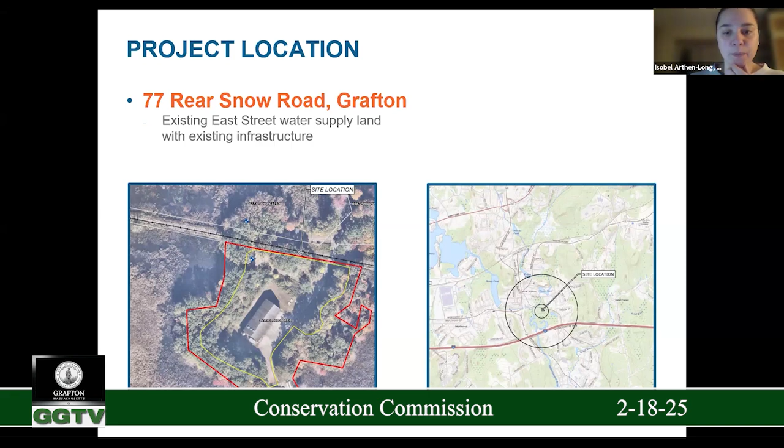Can move to the next. A little bit of project background. The Grafton Water District is supplied by 5 groundwater supply wells, 2 of which are located at East Street. PFAS concentrations measured in these 2 wells have been between 10 and 20 parts per trillion. Until 2024, these concentrations were below the maximum contaminant limits for PFAS.

But last year, the EPA lowered these limits to 4 parts per trillion. So in order to remain in compliance with drinking water quality standards, the district either needs to treat for PFAS to lower those concentrations, or would be forced to take those wells exceeding 4 parts per trillion offline, which would then impact their ability to provide sufficient water to meet their water supply demand.

Could you give a brief description of what PFAS is and why it's important that it's being removed? Sure. These are persistent chemicals that have become very widespread in our environment and particularly in water. Certainly not an expert, but they're chemicals found in many different products that we use. They're found in the linings of freezer boxes and takeout containers, found in detergents, found in all sorts of materials, and they've accumulated within our water supplies. There's a lot of research going on now into the long-term effects of exposure to these compounds.

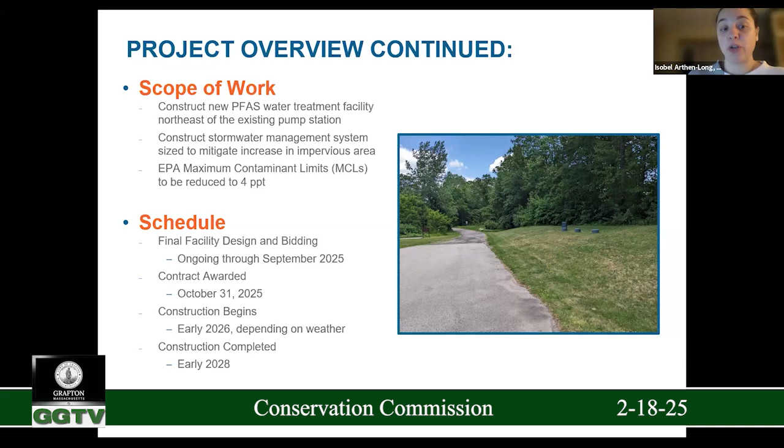So let's move on to the plans here. We supplied plans to you all. I hope that you've been able to review them.

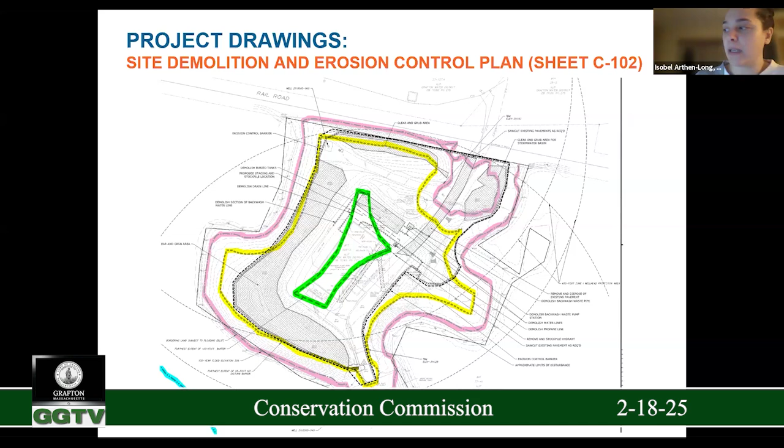Things to draw your attention to here, you can see around the limit of work is going to be our proposed new tree line. And along that limit of work, you can also see the placed erosion controls.

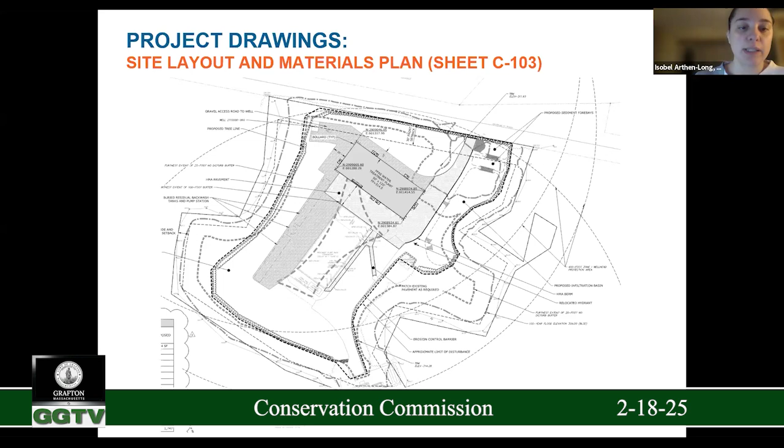That will also reestablish a gravel access route to one of the existing wells.

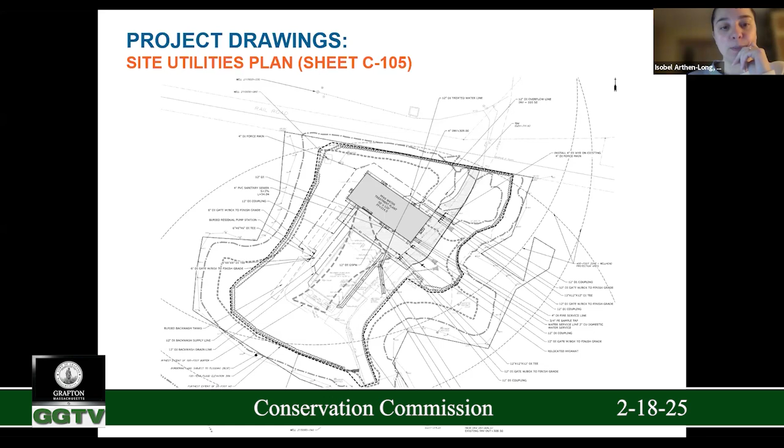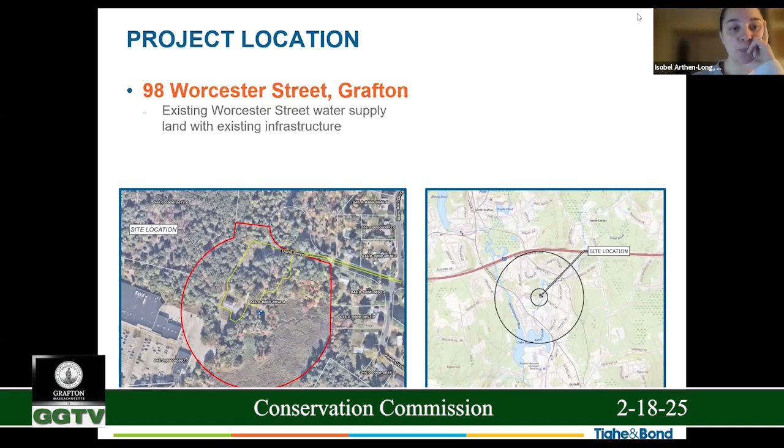So it's the same story at Worcester Street as it is at East Street. The PFAS concentrations at Worcester Street have measured in that same range, between 10 and 20 parts per trillion, which until last year have been in compliance with maximum contaminant limits. The intention of the project is the same: to treat these PFAS levels to bring them below the new 4 parts per trillion maximum contaminant limit. This treatment plant will also have manganese and iron treatment to keep below those thresholds. So in addition to PFAS, it'll be treating for those metals.

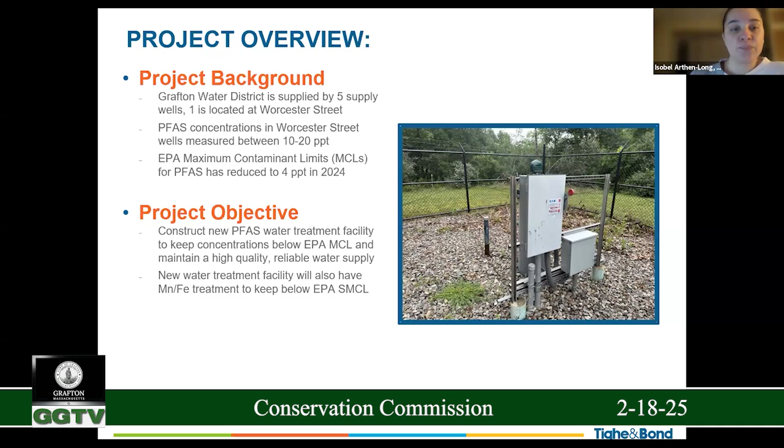So the scope of work is very similar here. We'll be constructing one new water treatment facility to treat for manganese, iron, and PFAS. It'll be just northeast of the existing treatment facility. Likewise, we'll be constructing a stormwater management system to mitigate the increase in impervious area.

The schedule is the same. These are being treated as a single project for all other purposes, so they'll be on the same timeline.

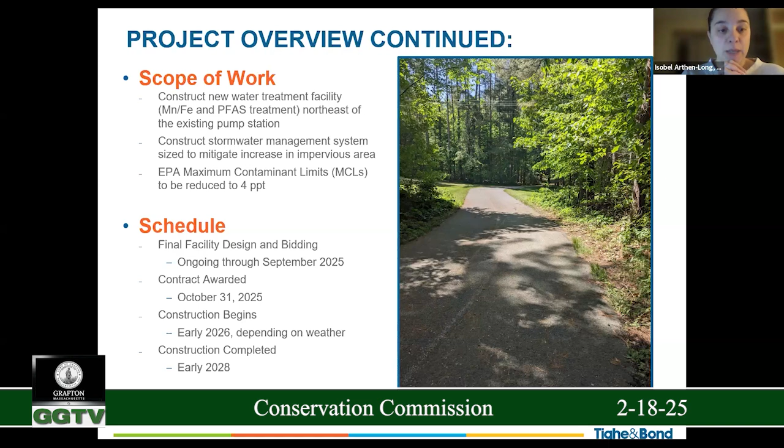I'll also mention that the entire limit of disturbance at this site is located within mapped wood turtle habitat, which is listed as a species of special concern in Massachusetts.

So again, on this sheet - if you just go back one, thank you - the hatched areas show the limit of clearing and grubbing, as well as the saw cutting of this existing access road that will be repaved running through the center of the site.

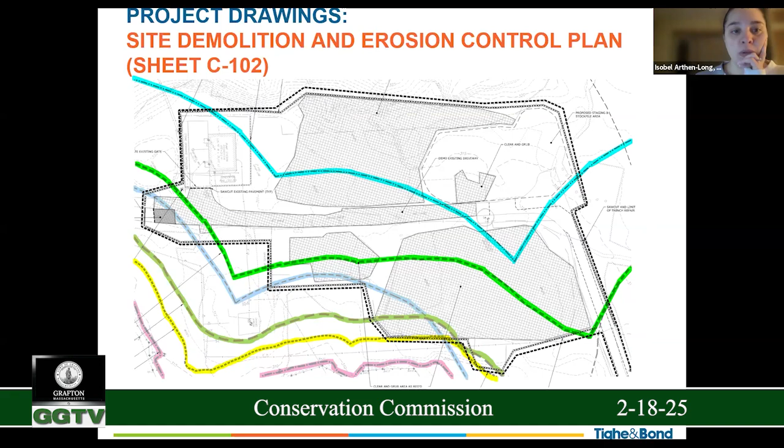Okay, we can skip now. We do have a north arrow shown on this one, so it's pointing towards the top right corner of the screen.

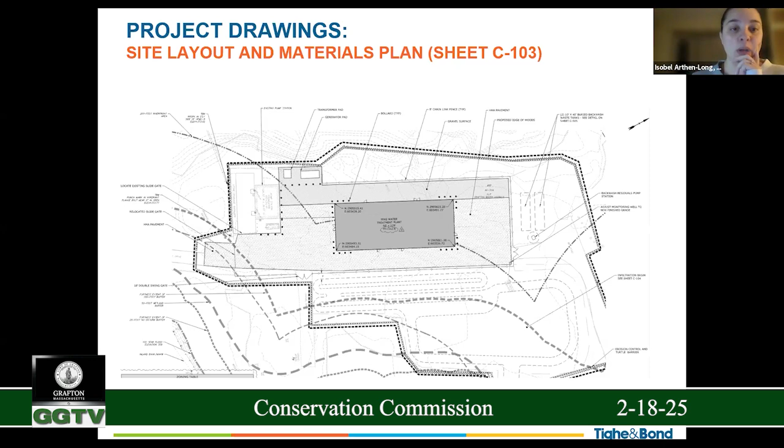Again, you can see here the proposed new tree line just around the limit of disturbance, where there are also proposed erosion controls in place. The footprint of the new water treatment plant is located approximately 60 feet from the existing facility. And we have paved access areas around 3 sides of this building, and then a gravel area up above it in this location in the rear of the building.

Go on to the next, showing site grading at the site. Again, it's proposed primarily to manage stormwater at the site. And this stormwater system has been designed to fully mitigate the increased impervious area and comply with Massachusetts stormwater standards and local bylaw.

Okay, look at site utilities here. This sheet shows new and replacement site utilities. Some of these utility installations will be taking place within existing paved areas and qualify as exempt under the Wetlands Protection Act.

If you go down to the next one, the site utilities at this site extend down Doris Drive. And since this is a new area, I have our resource areas delineated here again, or highlighted. All of these utility installations will be within the paved roadway right-of-way. There are some areas that are within buffer zone and riverfront area that, again, meet that exemption.

There are a couple of areas where the 25-foot buffer zone to wetlands and bank slightly overlaps with the limit of disturbance that's shown. We're showing the limit of disturbance here as the full width of the road, but these trenches will probably be about 5 feet wide a piece. So they may or may not actually overlap with the work that is being done, but we did report impacts associated with underground utility installation within that 25-foot buffer zone. It just may or may not overlap, and we are requesting a waiver in the event that that work does occur within those areas.

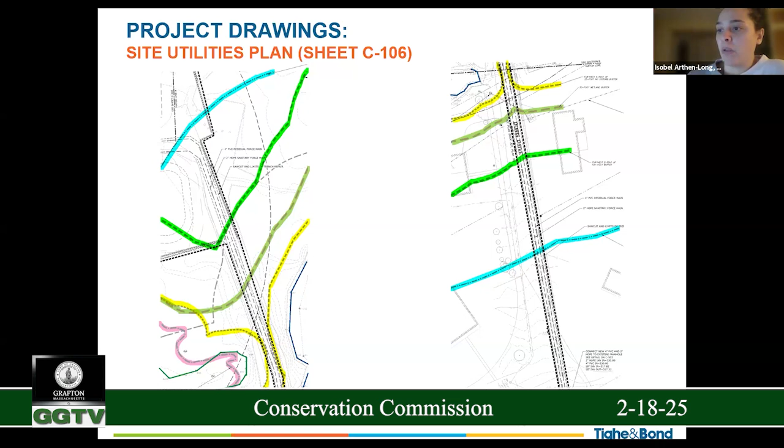So if you go down to the impact table for this site, we have no impacts to BLSF as we did in the other site. This time we're working with riverfront area as the direct impacts to resource areas. Other than that, it's again fully buffer zone and setback impacts, as well as rare species habitat.

I'll mention that this project is being reviewed concurrently under the Massachusetts Endangered Species Act. We expect to have a response from the Natural Heritage and Endangered Species Program by the end of the month, and we'll report back to you with what they have to say about impacts to wood turtles. We've submitted a wood turtle protection plan to make sure they're excluded from the site during construction, and that'll involve trainings and the placement of fencing to keep them out of the construction area.

So if you all have questions or items to discuss, we are happy to hear them. Ali, I want to start with your review. Sure.

So I listed the impacts for you guys at the top. They are at about 23% of the riverfront area. So I guess one of my questions would be whether or not there's any proposal to maybe protect or restore a section because of exceeding the 10%.

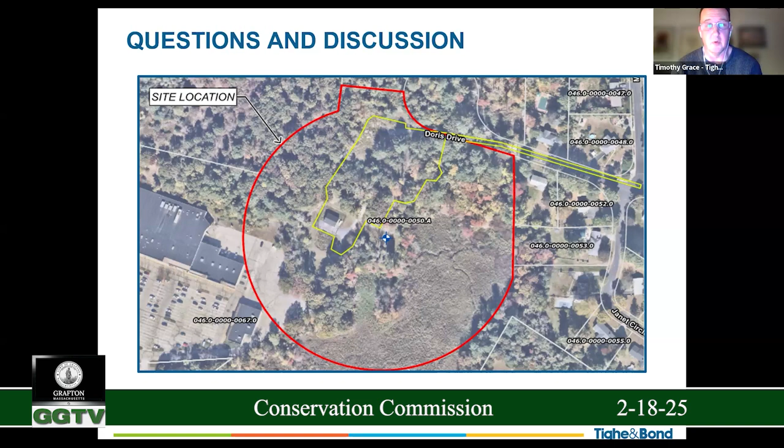We're generally trying to maintain the existing topography of the site, which is why the stormwater is located where it is. In general, the stormwater flows—I'm thinking of the plans right now, if you want to go back to those—it flows from basically the top of the screen down to the bottom of the screen. And so we basically try to maintain that same hydrologic pattern and size the stormwater features to pick up all the impervious coverage we can capture.

The roof is getting piped directly into the basin because we don't need to pre-treat it. Similar story with pavement and gravel. We're trying to minimize just what we need out there to get a truck turned around. And so we have a little bit of wiggle room, but not much more on this site as opposed to the East Street site. Yeah, it's just not as proximate to what we care about in the wetland resource areas. It's a little bit less. Doesn't mean it's not a constrained site.

Okay, I will go around to our commissioners to see if they have any questions. Travis, anything on this one? No, nothing on this one. Okay, Jonathan? Nope, nothing.

Amira: No questions. Bill: Nothing from me.

Okay, so obviously we understand that you're still responding to DEP, that some of the design of the stormwater is in progress, and obviously issues with natural heritage, you're in that process also. So we understand that we will have changes coming.

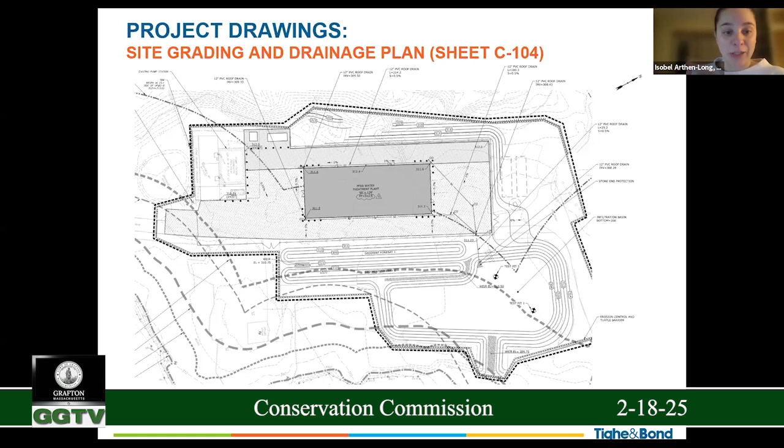Yes, we will request a continuance to your March 4th meeting, at which point we hope to have our MEPA certificate issued, our comments from Natural Heritage, and our final drawings submitted to you all. We understand those additional materials need to be submitted a week in advance.

Just a couple other things, as a heads up for you. We understand that you're going in front of the planning board. Obviously it's up to you on how you do your sequencing and timing of it. It is what it is. It's up to you on how you want to continue our hearings and whether you want to align it with planning board, that's your choice. I'm absolutely fine with it.

And then we do have some standard things that we will request. Obviously, my guess is both of these are more than an acre of disturbance. And does it require a SWPPP?

Yes, I believe - Tim or Amber, if you have that answer right in front of you, you can jump in. But again, we don't need to know that, other than the fact that we'll request copies of them. We're not reviewing something that's going to EPA, we just want to have it for our records and so forth. Of course, but those are a couple heads up.

But I think next time it's getting our peer review, any kind of updates, and seeing what other kind of progress you can make in responding to some of DEP's comments.

Leah, should we go through DEP's comments for this site? Yeah, we could do that, that shouldn't take too long, hopefully. And so if you could do the same thing with the DEP comments for this site, that would be great, and then we can kind of move to a continuance.